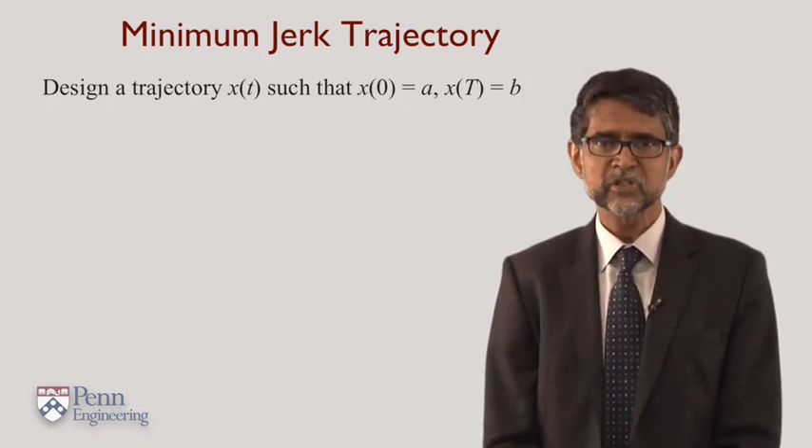What remains can be simplified into the sixth-order differential equation, which then can be solved analytically, and the result is this fifth-order polynomial in time.

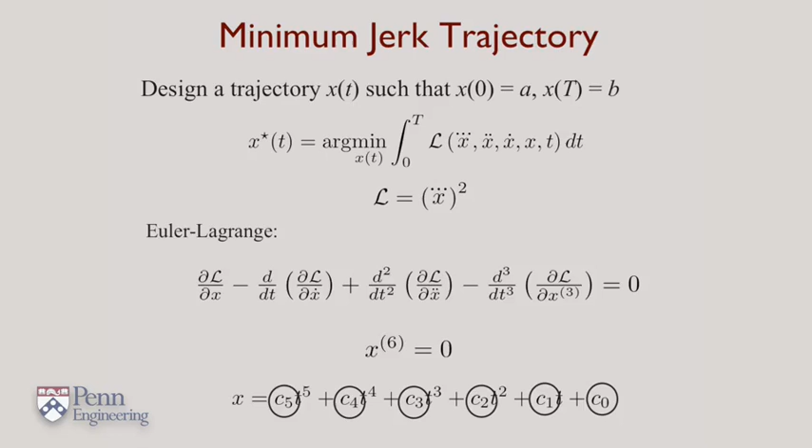What remains is the subproblem of solving for the coefficients in this fifth-order polynomial. There are 6 such coefficients. In order to solve for these, you need to specify additional boundary conditions.

We've assumed that we know the position at the start position and the end position. Now let's also assume that we know the velocities, and in this case, I've just assumed that these velocities are 0. In addition, let's assume we know the accelerations, and again assuming these accelerations are 0.

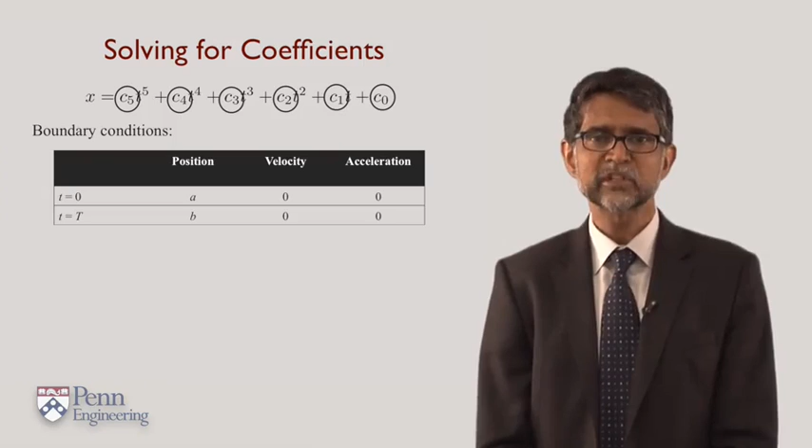The main goal of this exercise is to ensure that you have as many boundary conditions as the constants you're trying to solve for. Each of these boundary conditions gives you an equation. You can write down 6 equations in terms of the unknown constants and in terms of the known boundary conditions. Solving for these constants is now a linear problem.

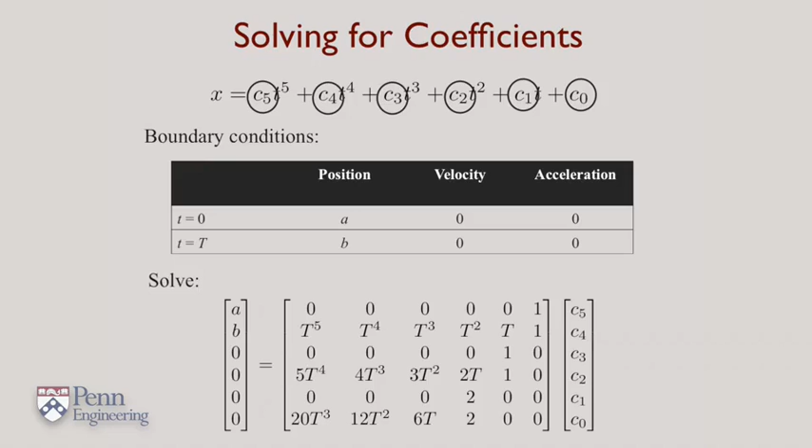This is what the minimum jerk solution looks like. For this particular case, we've taken x starting from 0 and ending up at 1, taking a total of 50 time units.

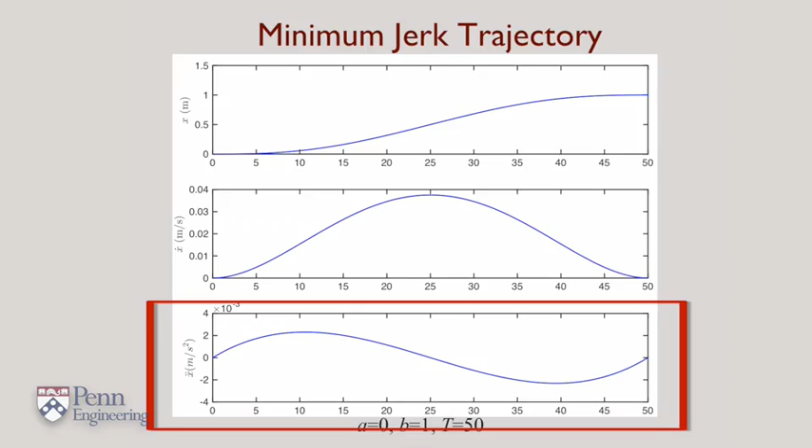The velocity profile is bell-shaped, starting off with a 0 velocity, ending with a 0 velocity. It's unimodal, reaching a peak velocity in the middle. And the acceleration looks sinusoidal, again starting off with a 0 acceleration, reaching a peak acceleration, and then going all the way down to a peak deceleration, and then ending up at 0.

This basic idea can be extended to multiple dimensions. If you're trying to generate trajectories in the xy plane, then you end up with 2 Euler-Lagrange equations, one for the x direction and one for the y direction.

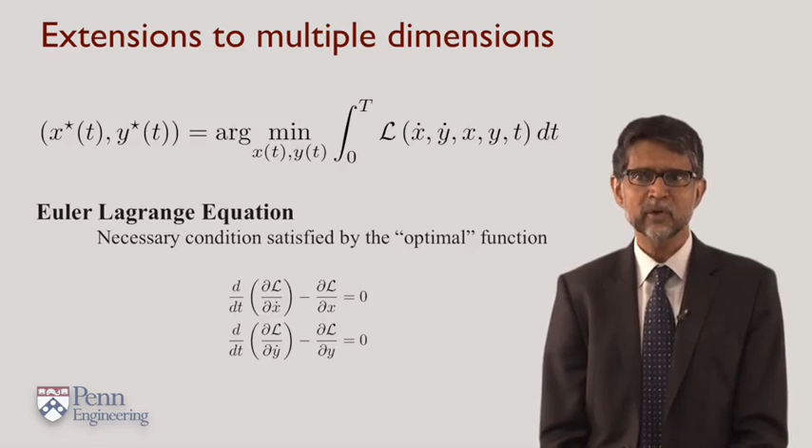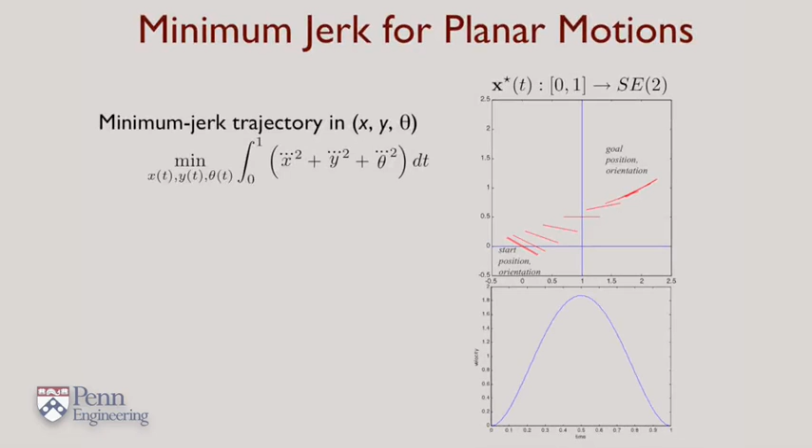Here's how you might think about the minimum jerk trajectory in 3 dimensions. Here we're looking at a trajectory in the x, y, and theta space. We're assuming we're given a starting x and y position and a starting orientation theta, and we're given a final x, y, and theta. We're trying to find a trajectory that minimizes the functional that is given by x triple dot squared plus y triple dot squared plus theta triple dot squared.

If I use the version of the Euler-Lagrange equations for multiple dimensions, I end up with a very straightforward solution. I essentially get 3 fifth-order polynomials, one in the x direction, one in the y direction, and one in the theta direction.

By plugging in the boundary conditions, I get the plots that you see on the right-hand side. You see the starting position and orientation and the end position and orientation, and a smooth transition from the start to the end, and a velocity profile that is once again bell-shaped.

It turns out that this particular problem is also relevant to modeling human manipulation tasks. This literature goes back to 1985 to a doctoral dissertation by Tamar Flash, and can be extended to multiple dimensions if you consider two-handed manipulation tasks.

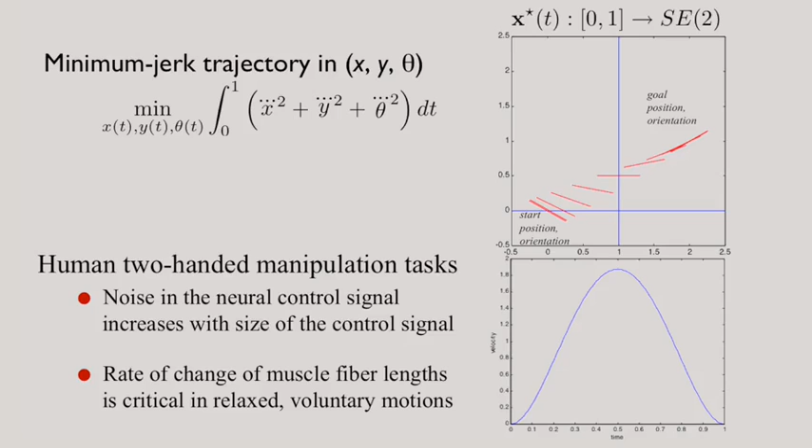But we turn back now to our problem in robotics. In robotics, it's not sufficient to specify just the initial and final position and orientation. In order to ensure the trajectory is safe, you might want to specify intermediate waypoints.

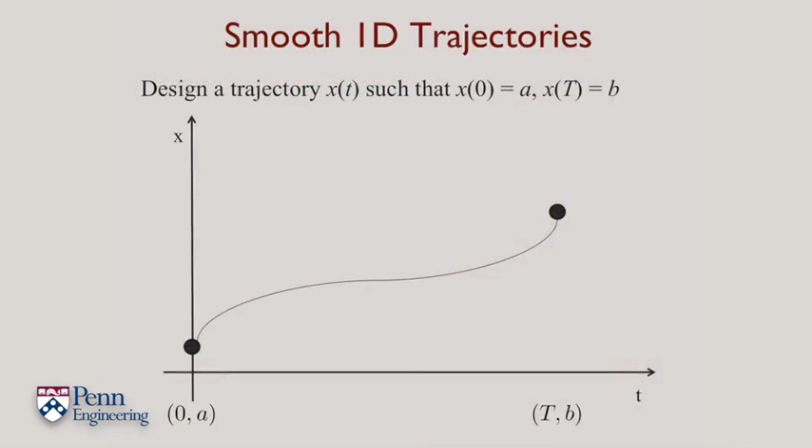Instead of thinking simply about trajectories with known starting and end configurations, we want to think about trajectories that pass through intermediate waypoints. So let's consider the problem where you're given a set of intermediate time points and positions that you require the trajectory to pass through.

So these time points are t0, t1, etc., and the corresponding positions are x0, x1, etc. In this case, we have assumed that there are m+1 time points and m+1 corresponding positions.

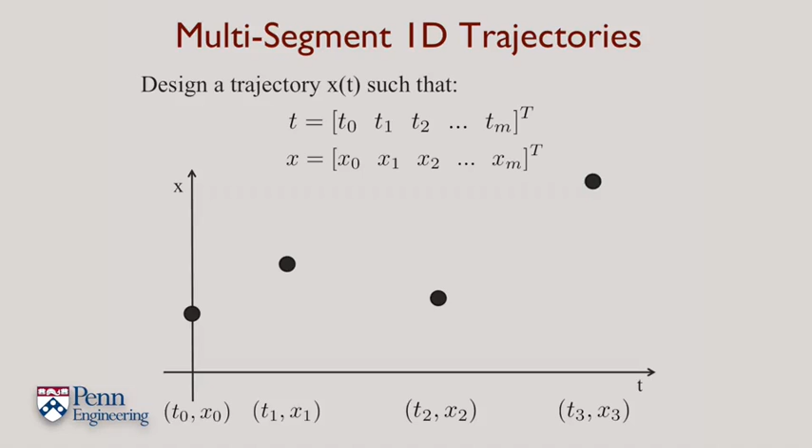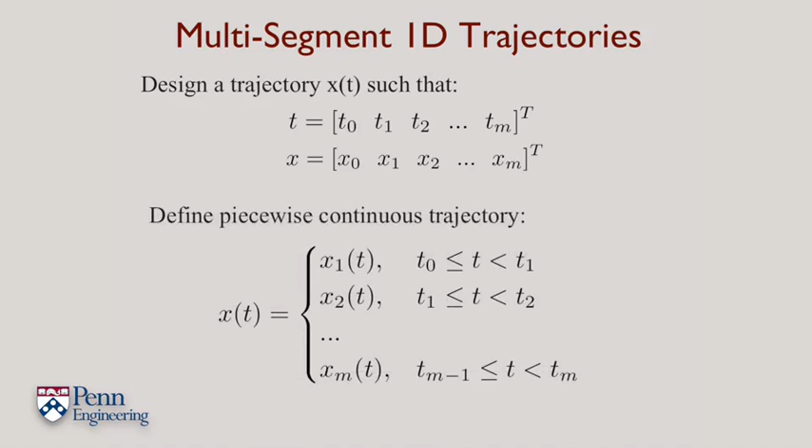A simple way to approach this is to define piecewise continuous trajectories, one for each time segment. The obvious way of doing it is to simply connect the waypoints. But this is not very practical.

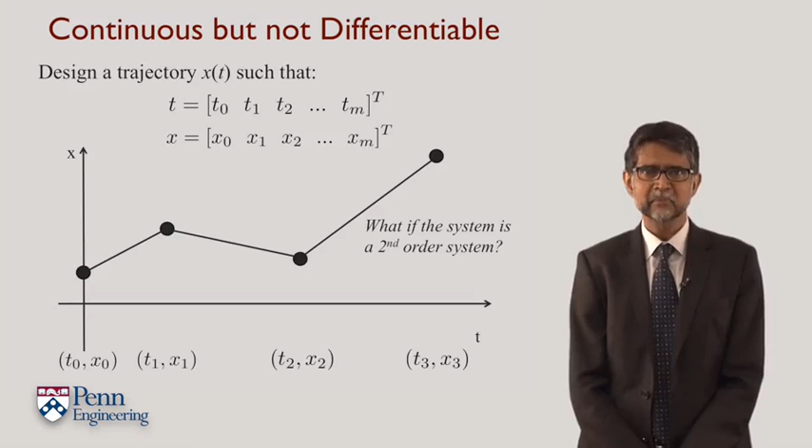What if the system is a second-order system with inertia? Once you get started on the first segment, it's impossible for a second-order system to make the sharp turn at the kink. In order to make the trajectory more amenable to a second-order system, you want to insist that the trajectory is smooth and not have this kink that you see at the intermediate time points.

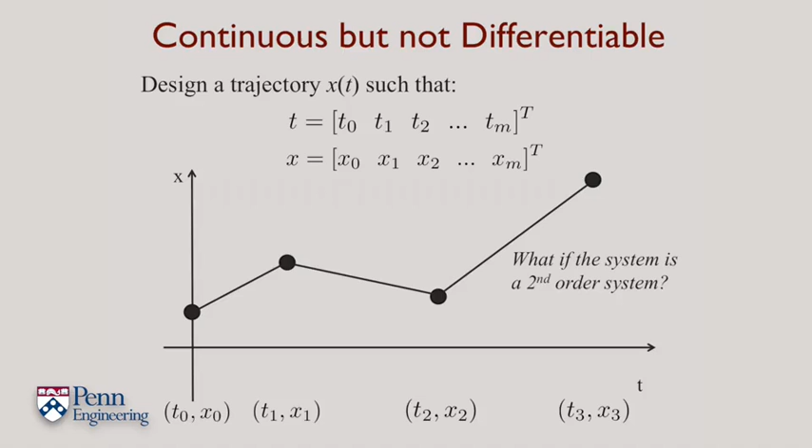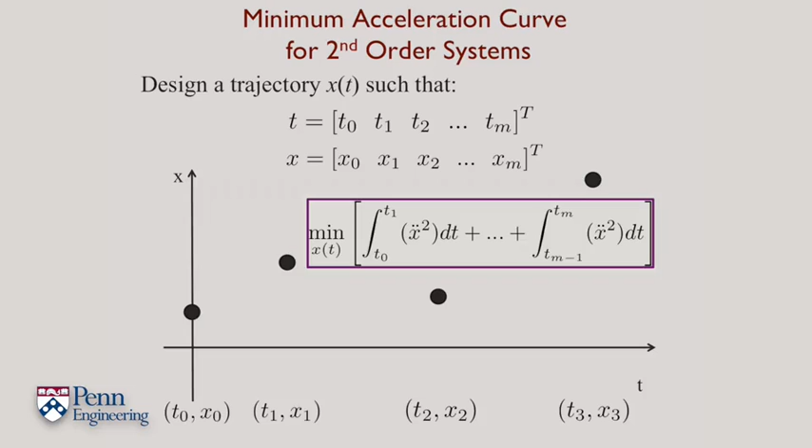To see how to solve this problem, let's look at a minimum acceleration curve for second-order systems. We look at the problem of solving for this function, x of t, but now the functional consists of many terms. Each term corresponds to a particular segment.

From the Euler-Lagrange equations, if we solve this, we'll find that we get cubics for each segment. The resulting function or curve is called a cubic spline. So we now know the functional form of each segment.

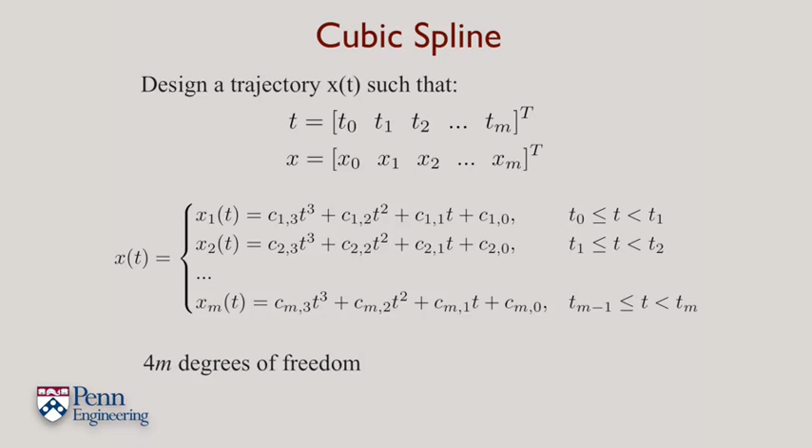However, we don't have the constants. You'll see that there are 4m constants for this cubic spline. Each of these constants corresponds to a degree of freedom. In order to determine these constants, we have to specify 4m different boundary conditions or intermediate conditions.

Going back to our schematic, we're looking for a smooth curve. We know where these intermediate points are, and that gives us 2m boundary conditions. We further insist that the curve is smooth, more specifically differentiable up to 2 times at each of these intermediate points. That gives us an additional 2 times m-1 boundary conditions.

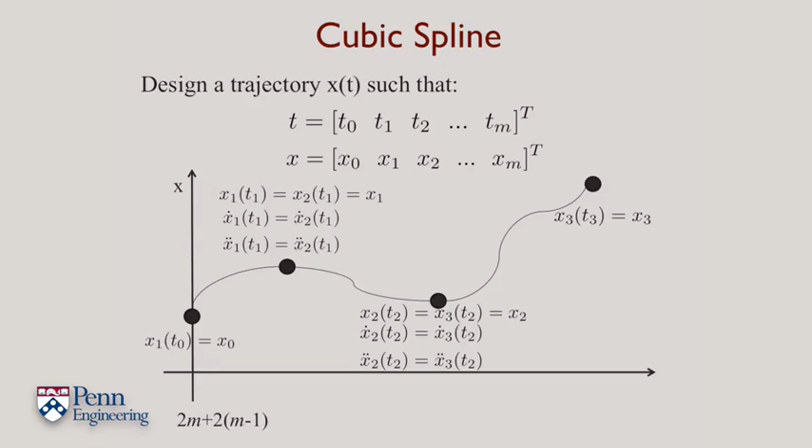And then finally, we insist that the curve starts with a specified velocity and ends with a specified velocity. In this case, that velocity is taken to be 0. That gives us an additional 2 boundary conditions.

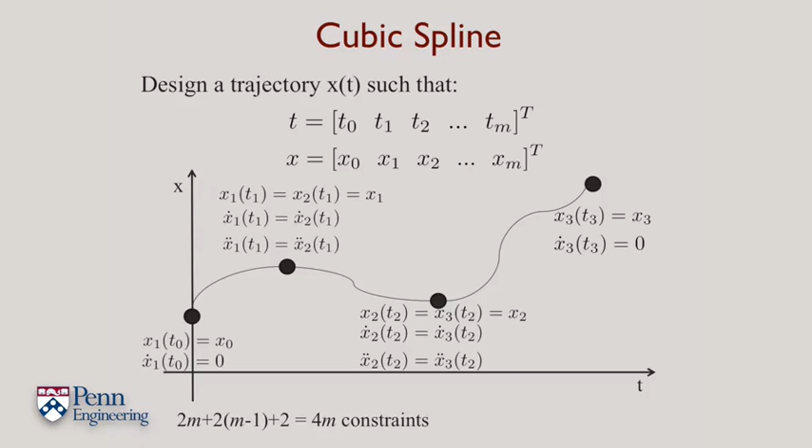If I add these up, I get 4m constraints, allowing me to specify the 4m degrees of freedom associated with the undetermined constants. This basic idea can be generalized to nth-order systems.

We have to specify appropriate boundary conditions in the beginning and in the end, and we have to specify intermediate boundary conditions. And these intermediate boundary conditions specify continuity up to the 2 times n-1th order derivative.

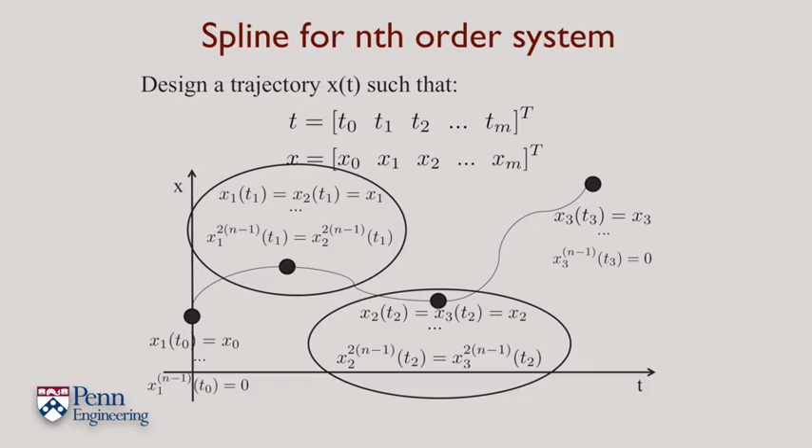This leads us to minimum snap trajectories where n is equal to 4. We're now ready to solve the motion planning problem for quadrotors using minimum snap trajectories.